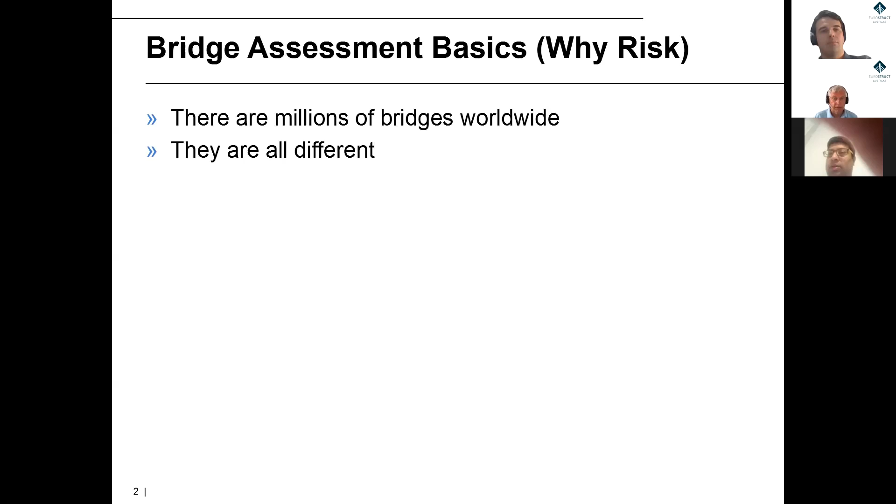We have millions of bridges worldwide, and they are all different. Of course there are some groups, and like in the US, sometimes you have very similar ones, but actually they are all more or less prototypes. So there is no one-size-fits-all strategy. This means you cannot just take a textbook and do bridge assessment just following a cooking recipe. This will not work, so we have to be flexible.

It's all about the availability and quality of information we have. This is also in relation to what Rade said in one of his talks before this one, that information is the basis for everything. We can do modeling, but if we have, let's say, halfway through information, our models will be wrong. In my practice, working on a couple of thousand bridges so far, I always found that the availability is never perfect. So if we have 50% of the necessary data in good quality, that's quite a lot.

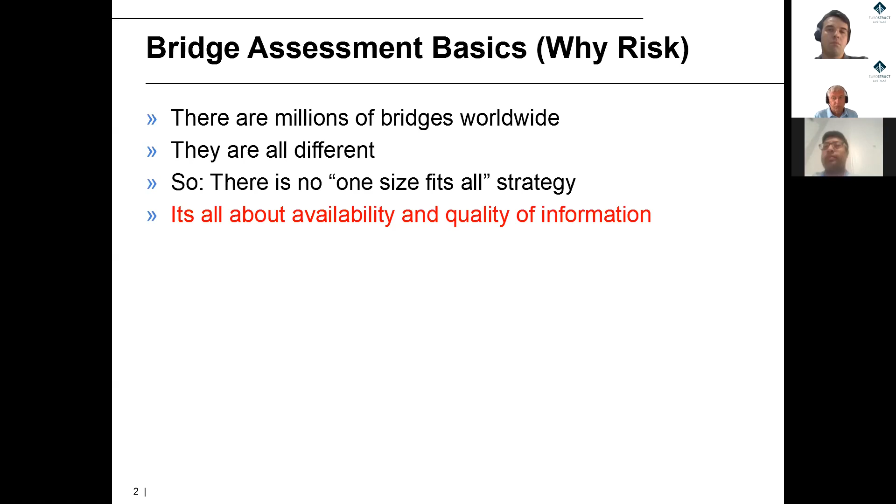So if you have clients working in this subject, tell them that this is the data, this is the asset they have. Now for monitoring: monitoring is mature. It is well developed and it shows performance. So a very, very good tool which we definitely need.

Our models depend on parameters. If we can measure these parameters, we can reduce the uncertainties. If we just estimate them, uncertainties will be much bigger. So this is one of the main purposes of applying monitoring systems: to measure parameters and reduce the uncertainties. This will make the assessment more reliable and to the point.

By to the point, I mean that very often we have certain aspects to look at. It is not only one risk, or one type of performance, or one type of excessive load to a structure—there are always several, and we have to go through them one by one. But if we have a very specific case, the monitoring system can measure your specific parameters and give you very good answers.

You can monitor everything, but it is economically not feasible to monitor everything. Monitoring systems have costs, and if you put thousands of sensors, first you have to pay for the system, and second you have to manage it, which are running costs no owner is normally willing to bear. So what we have to implement is flexible strategies which fit categories of structures—similar to the importance factors in Eurocode. If you have a signature bridge, which is a huge investment, more monitoring is justified. If your bridge is a 5-meter span side bridge, it might not be justified to use a lot of monitoring.

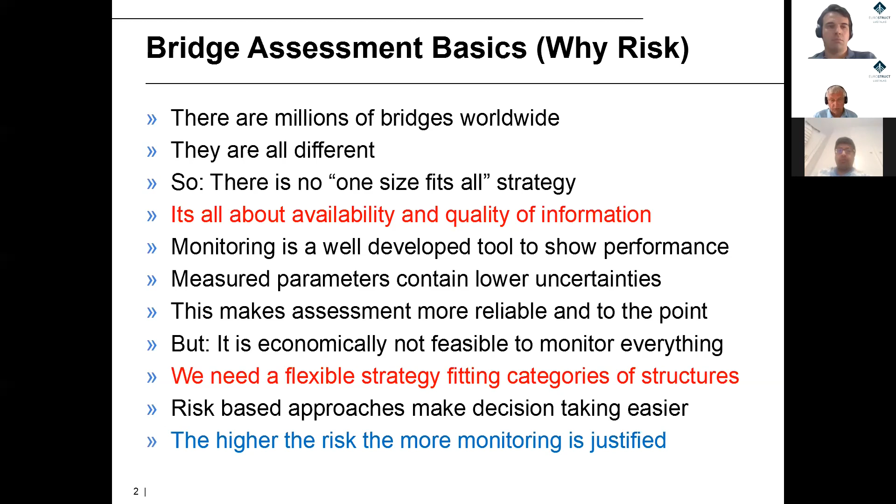So in the end, the higher the risk, the more monitoring is justified. I will talk about this a little bit later again.

So what does risk-based asset management mean? The objective of an asset manager is to get the best and most economic performance. The asset manager has only a certain budget, and has to apply it in the best and most economic way. I think that's a very simple objective. But risk is actually what jeopardizes this objective.

ISO 31000 defines risk as the effect of uncertainties on the objectives. And ISO 31000 is a risk management framework, which also proposes monitoring in order to reduce these uncertainties. So there is a background that has already been recognized worldwide and documented in the code.

So what we have to do is adjust asset management to the actual performance. This is easy to say but difficult to perform, and it has a very high impact on economic performance. I will show you later a graph where it is easy to understand.

Or we can go for condition. This is what many engineers prefer because the word condition is well known to them—performance is not yet so popular in the industry. But condition is anyway a key indicator for performance, so you always have to look into condition, because it will tell you when you have to do what in the end.

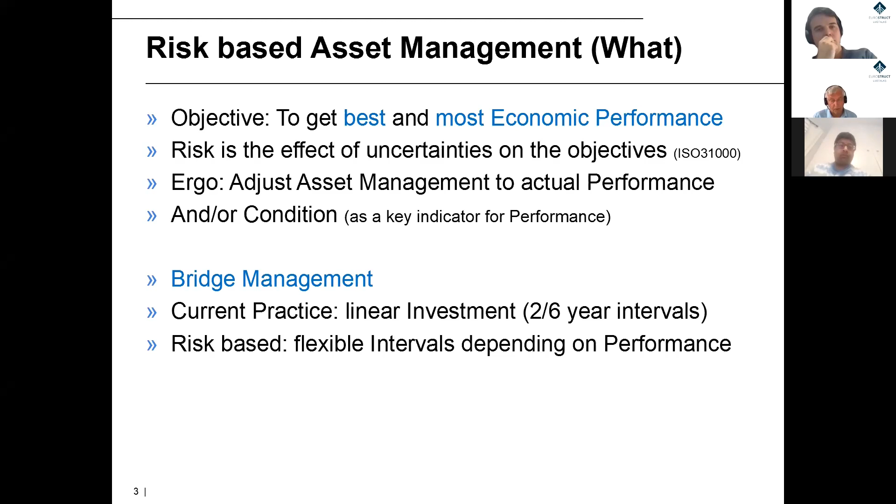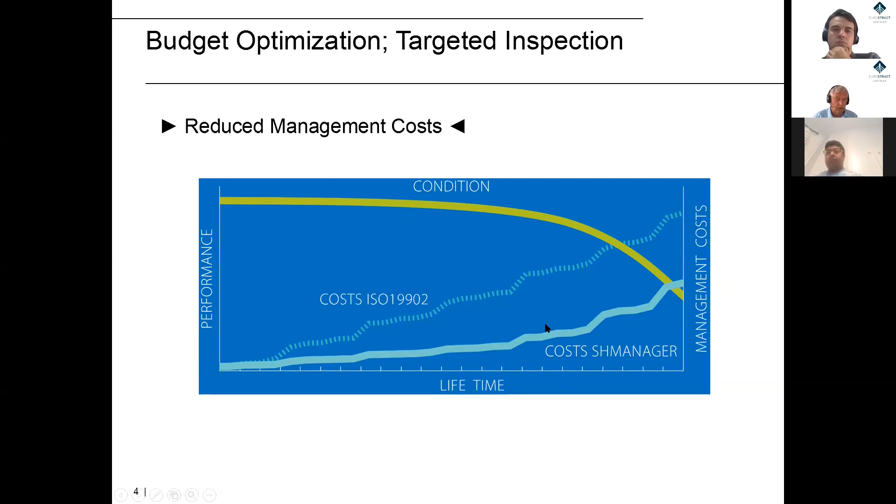Well, this does not mean that you save half of the costs, because the monitoring effort you have to put in here also has a cost. But it at least allows you, at the same cost, to achieve better performance.

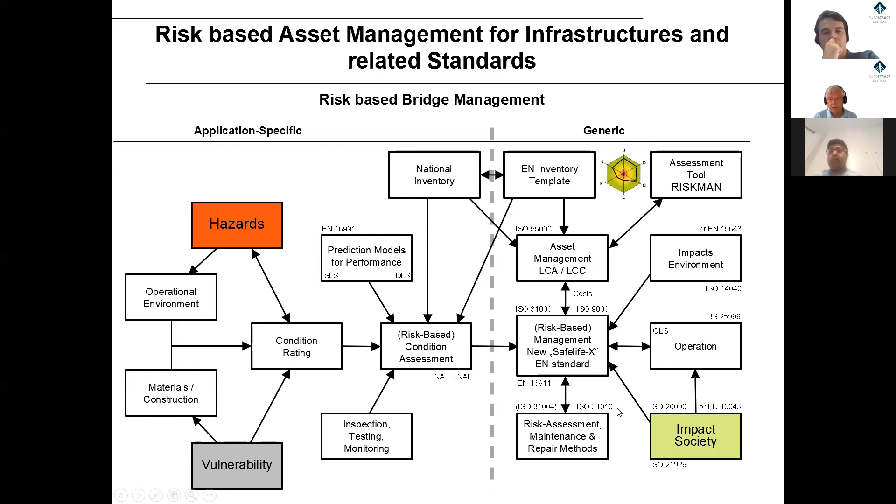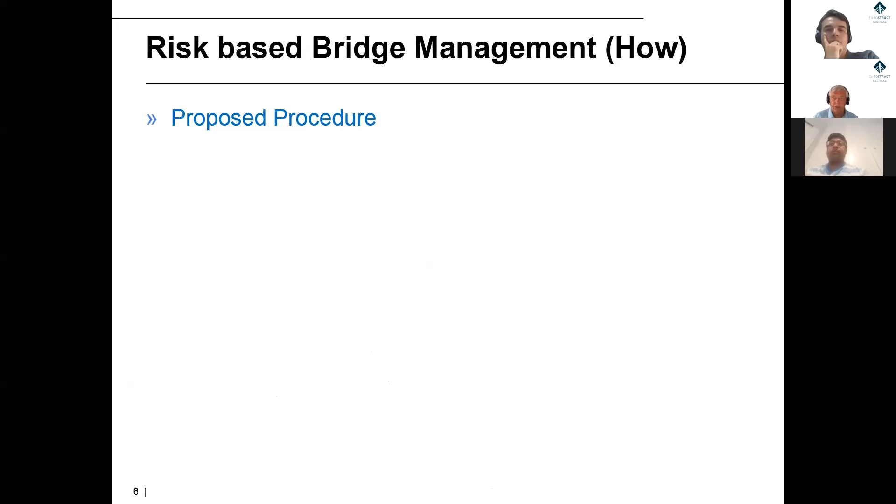Now, how to do that? What is risk-based bridge management? The proposed procedure, which I favor, is that we implement a suitable monitoring system. By suitable monitoring system, I mean it must not be one with 1,000 sensors, but something that just tells me that there is a change.

So just detection. In science, we would like to have detection, allocation, quantification, and all these things. But for bridge management, in the first place, this is not necessary. It is just necessary to get information that something is going wrong or going outside of your performance model.

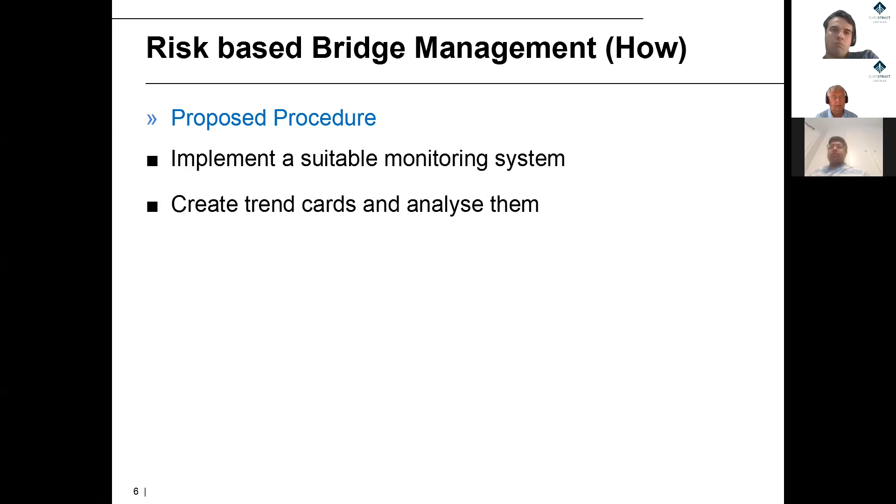The monitoring system will create trend cards. This means we look at the data time-wise and we analyze them. By doing that, we can reduce visual inspection by 50% through flexible intervals, as I have explained before. But you have to make sure that this does not bring you into a reliability situation you do not like.

And with this information created from the trend card, you can perform targeted mitigation. Mitigation is cheaper the earlier you find there is a problem. Monitoring systems are two orders of magnitude more sensitive than, let's say, an inspection every 2 or 6 years.

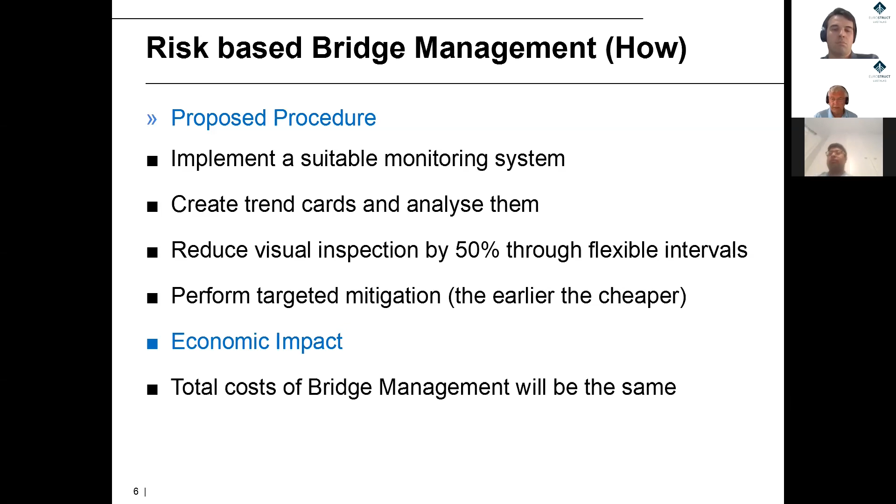So this means in the end, when you also include the mitigation costs, you will be much better off in this management. So what will be the economic impact? The total cost of bridge management will be the same. Monitoring costs money, and people that manage and maintain the monitoring cost money. But you can reduce the costs for inspection and other management activities. So you can keep it at the same level, but with much better performance.

So through this early detection, as I said before. Now, how do we do it in practice? For monitoring, we start with a small economic system that indicates changes in performance, or if you just call it condition - it's actually the same. It can be an index. An index does not have a very good reputation, but in the end, an index is understood by many people. One of the problems we have is that those working on the bridge hands-on do not have all this education in dynamic models or whatever it is, but they know what condition is.

In bridge management, we compute the risk. This does not mean we have only one risk - we have the risk of a storm, the risk of waves, the risk of traffic, of course. So we have to look into this separately. And then when we find some deviation from our normal predicted performance, we react on the changes.

Reacting on changes sometimes means: okay, I only know now that something is going not normal. Then I go out with a mobile system, or I make an intervention in the system in order to measure what is different.

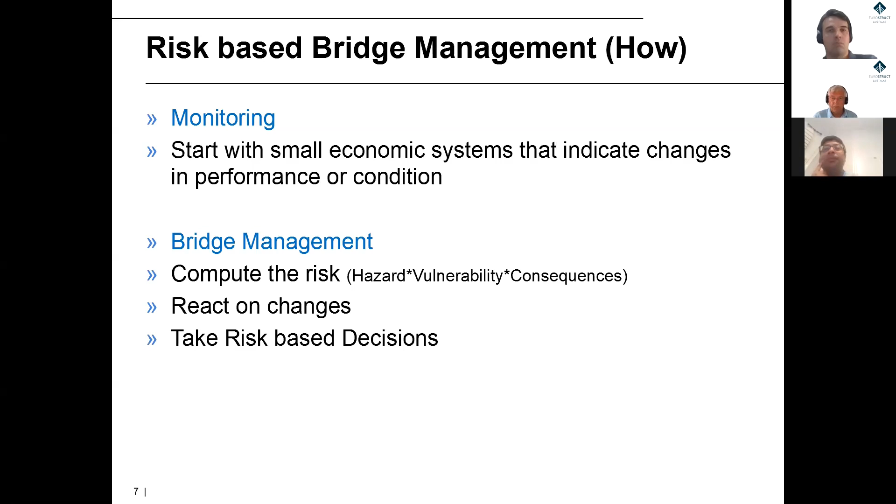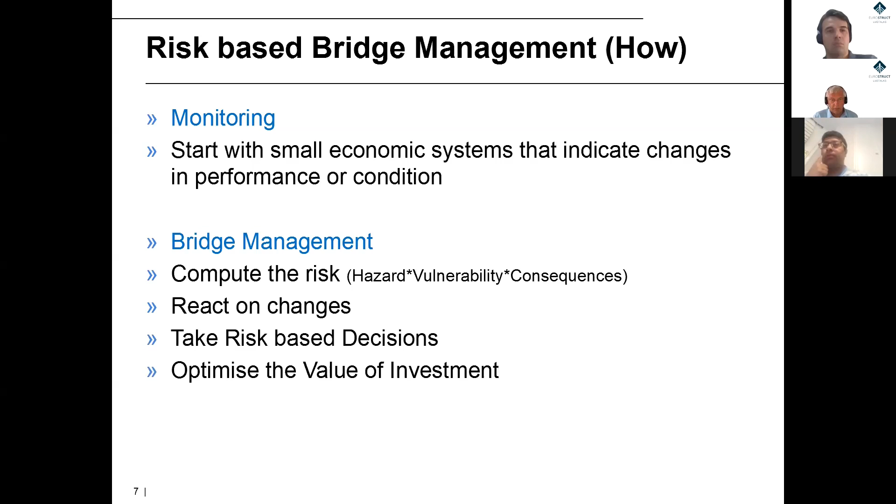Based on this information, I can take a risk-based decision, which are normally much better decisions. The problem is then the communication from the engineer to the decision maker, because decision makers in many cases are not engineers, but rather lawyers or economists. Therefore, this risk communication is something that decides between good and bad application. So it is advisable to look into this subject, and then you can optimize the value of investment.

One of the promising approaches was this one, a basic concept of change detection - this energy leakage. This is available from the IRIS project. This book is on the internet, you can download these things.

It's from large experiments - we have done full-scale tests in laboratories and on site to find out that when a structure is damaged, the energy which is in the fundamental frequencies is traveling to higher frequencies with the degree of damage. We call it cascades, and the number is just the mode where it goes to. This is a very reliable indicator, but it's not so easy when structures are very complex.

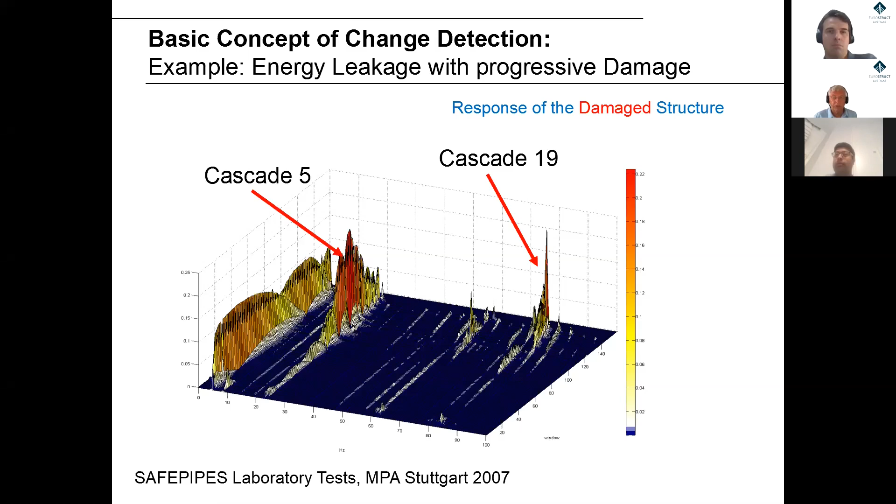This is an example from a real structure, a very big structure, where in the lower graph you see the structure is sound - it vibrates around 0.92 hertz. After a damage has happened, you see how different this is. It's the same structure, the same sensor, so you see the frequencies have dropped, and it is completely dispersing energy. This is something the computer can detect by itself - you don't have to do a manual evaluation, because the difference between these two is so big that it is easy to detect automatically. So in this case, this has already been applied successfully.

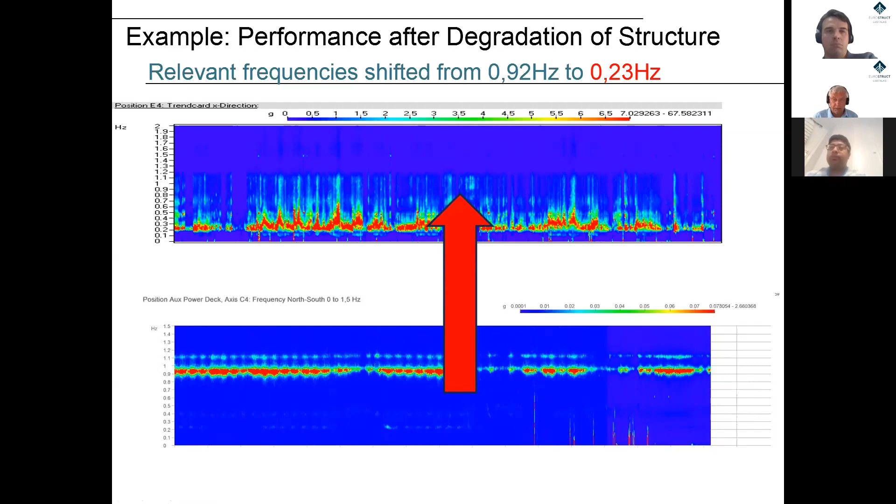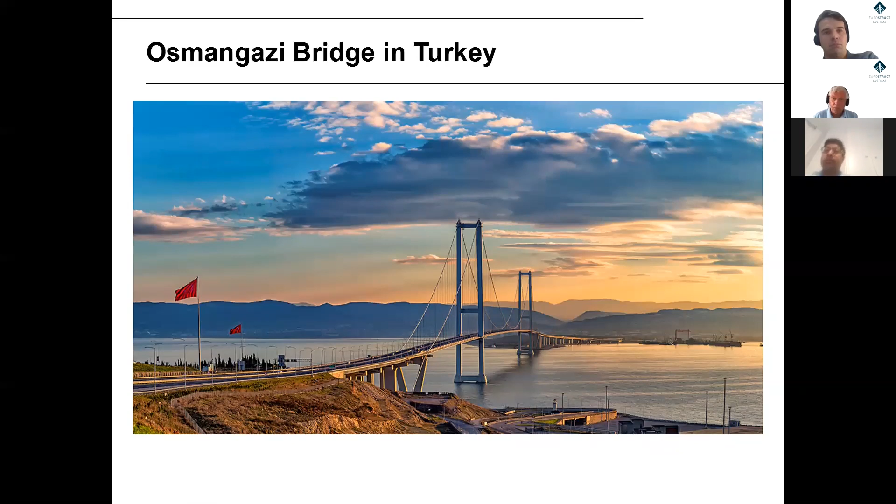Now I give you two examples from Turkey. There are a lot of very big bridges built in Turkey, with very interesting approaches and record spans. This is the Osman Gazi Bridge across the Izmit Bay, 1,550 meters main span. Such structures cost a billion dollars, so they deserve special attention.

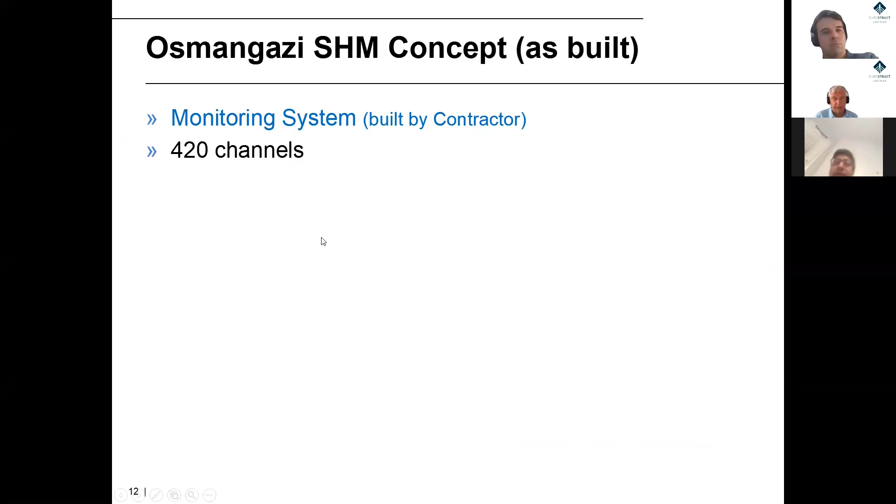The as-built structure's monitoring concept here was a monitoring system built by the contractor with 420 channels, dominantly fiber optic sensors. Fiber optic sensors give you very good information on strain, but only in a very limited place and in a very limited environment.

The asset management by the operator is different. The contractor gets a contract and goes away when everything is finished. The operator has to deal with this thing.

89 channels are permanently used for warning - this is for detection. This is only a little more than 20% of what we have here. And 331 channels are standby for rare events. You can play around with this channel, you can look at what happens, but in normal practical operation, there is no time and no personnel to do that. So the difference between what a contractor wants to do and what an operator needs sometimes creates some difficulties in using it.

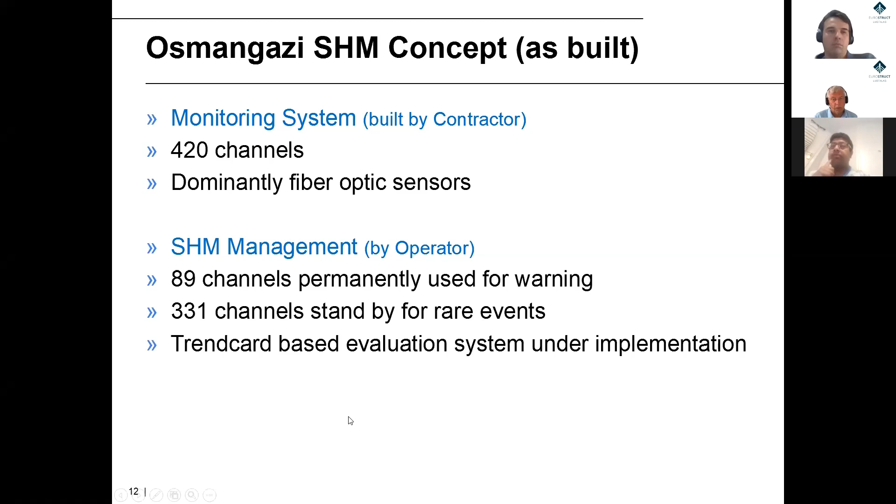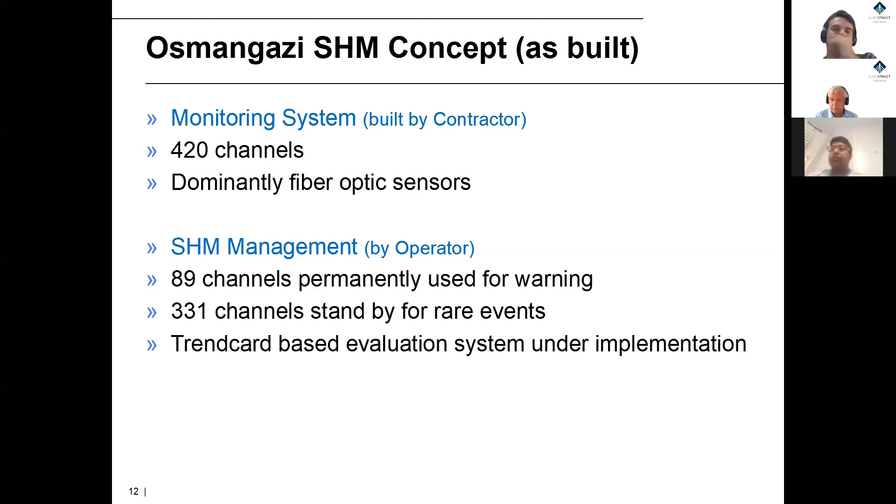This trend card-based evaluation system, as I've shown before, is currently being implemented by our Turkish colleagues. There are very good engineers there, and this will be one of the world-leading systems - it might make a good example. The second big bridge around Istanbul is the third Bosporus bridge in Turkey, also recently opened.

In this case, the bridge is now open for road traffic, but there will be a railway built in the middle. This is why you have these stay cables, and a suspension cable, which will finally support this railway structure.

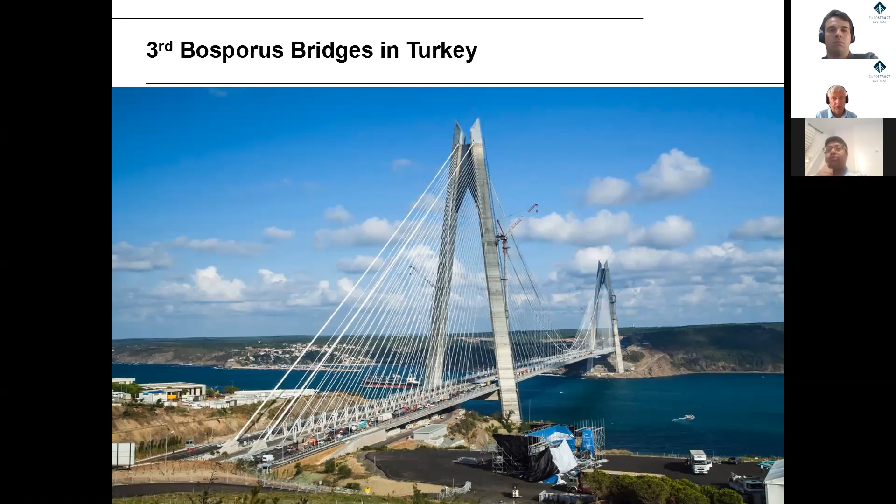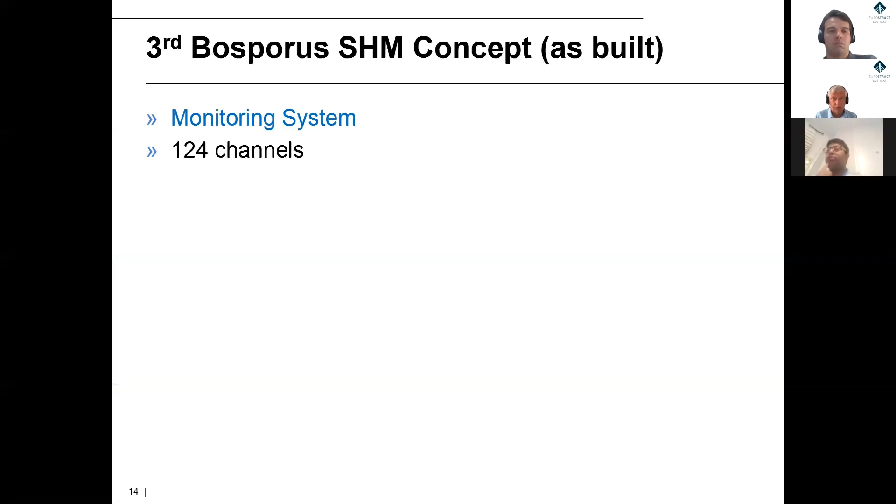In this case, we had the chance to discuss with everybody what the monitoring system should do. And the monitoring system only has 124 channels, and this is good enough. The bridge is 1,408 meters span - almost the same size - and it has dominantly dynamic sensors, acceleration and tilt.

With this, we get enough information to make this assessment. The SHM management needs 112 channels for warning and only 12 on standby. So in this case, at the time of construction, everybody was at one table. On the other project, there was nobody there from operation, unfortunately.

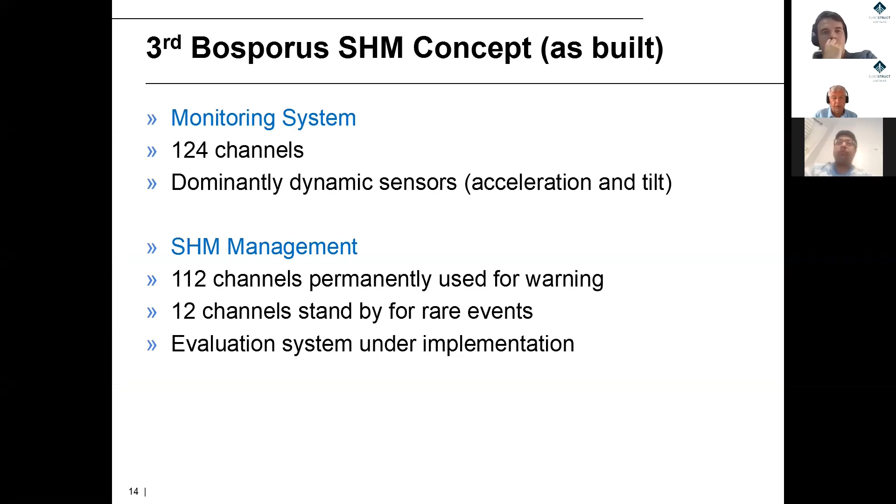Evaluation system is not yet ready.

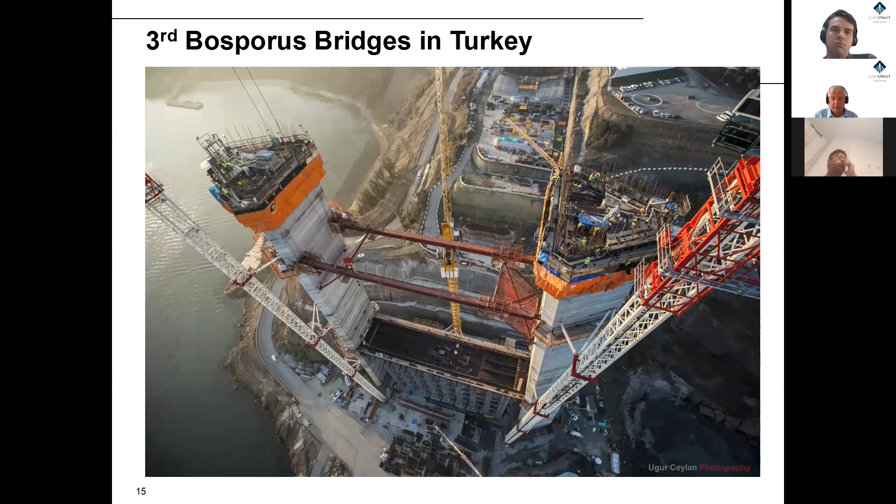Here was also a good example because we were able to monitor the pylons. These are the largest pylons in the world, 320 meters, and in freestanding position wind was a major issue. This dynamic monitoring was able to monitor during this erection, and the system was directly integrated into the final monitoring system. So from the beginning to the end, you can save money and use systems for several purposes.

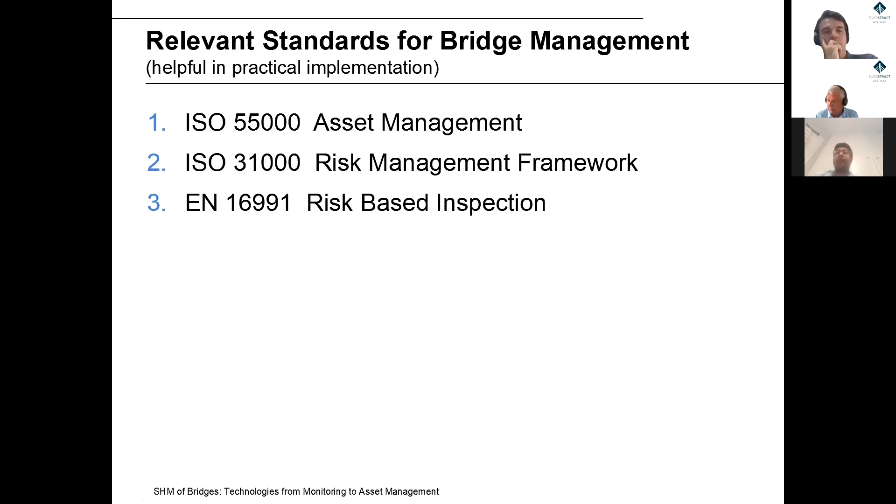Then there is this EN 16991. Vikram already mentioned it, on risk-based inspection. It's an industry code, but it contains the mathematical formulation of aging, which was developed based on bridges. So this code is very well usable, even though the title might lead you to the opinion that it is not good for bridges. It is good for bridges.

We are currently working on ISO 21928, which is sustainability of construction works. Unfortunately, due to some intervention from the United States, environment is not taken so seriously anymore, and we are in delay. We wanted to finish it last year, but we are still working on it. This code will give you all the indicators, the so-called soft indicators on economy, environment, and society.

This will round up our risk approach, because when your 5 meter span footbridge falls down, it's different than if one of the big bridges collapses. So this makes an impact on the decision.

In Germany, they're working on new guidelines and extension of DIN 1076. This is a very good example of a national code, but it requires a lot of input, which might not be enough funded in other countries. This one is our Austrian code, which I consider the most advanced one, but it is only in German, and only for Austria, based on the practice we have here, because we've been doing this for 25 years.

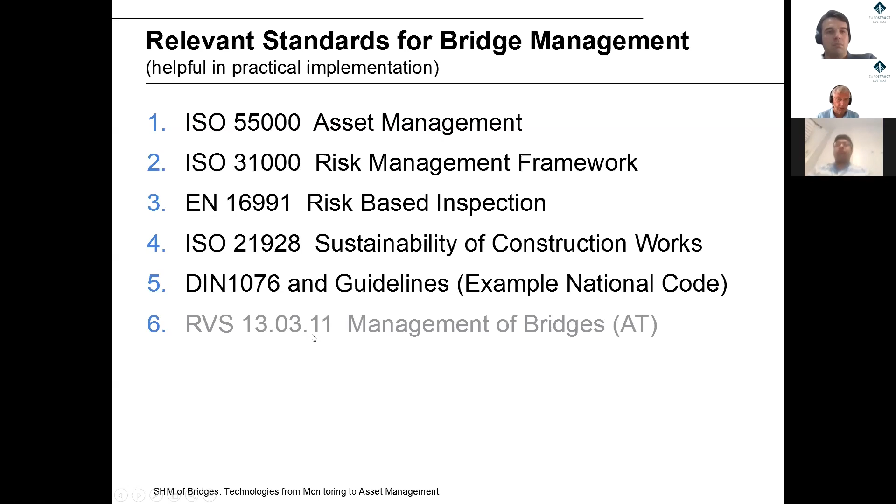You also have to consider the OSHA guidelines. This is for health and safety, and take your national safety and security guidelines into account, of course, and your individual management strategy. This means this is your expertise.

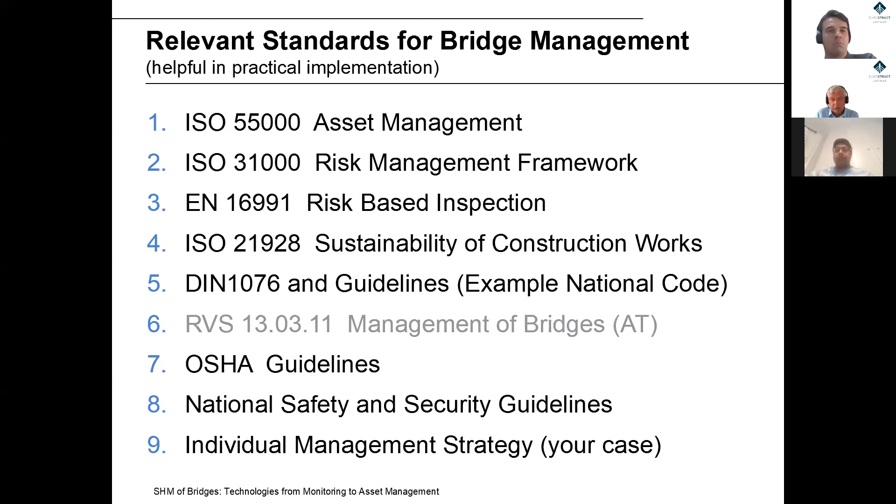Now, second last slide is on how do we show this. I was talking about communication, risk communication. This is a good way to communicate it.

Serviceability means operation limit state. This is your operation. This is an important thing, which is different from country to country and from the type of bridge, type of road, and so on. Economy is costs mainly. Environment are the sustainability factors.

The new ISO code will have about 130 factors, and there's a very nice list. There will be an Excel file where you can say, okay, this is important for me, this is not important for me. And then you can compute an index or whatever rating it is.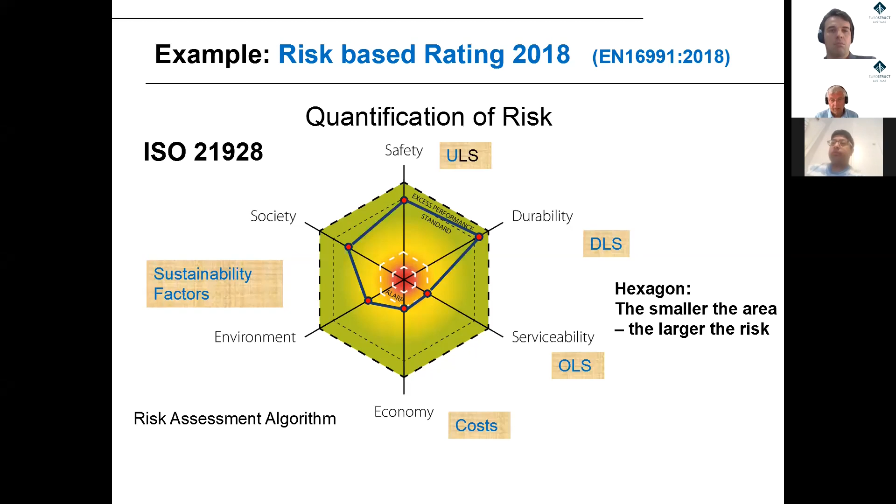As a summary, risk and performance-based approaches are preferable. They give you better results at the same costs, and if you apply them cleverly, you know we have a lot of bridges where we know there is nothing wrong, and they are very well designed, so this gives you a chance to even save money in operation.

A must is a good IT concept. You will either do it or not. If the IT concept is bad, you will have so many problems with IT that you say, forget it.

In future, we will definitely use BIM. We are not there yet in digital twins, but this will be helpful. I'm quite sure this will be helpful in this asset management work.

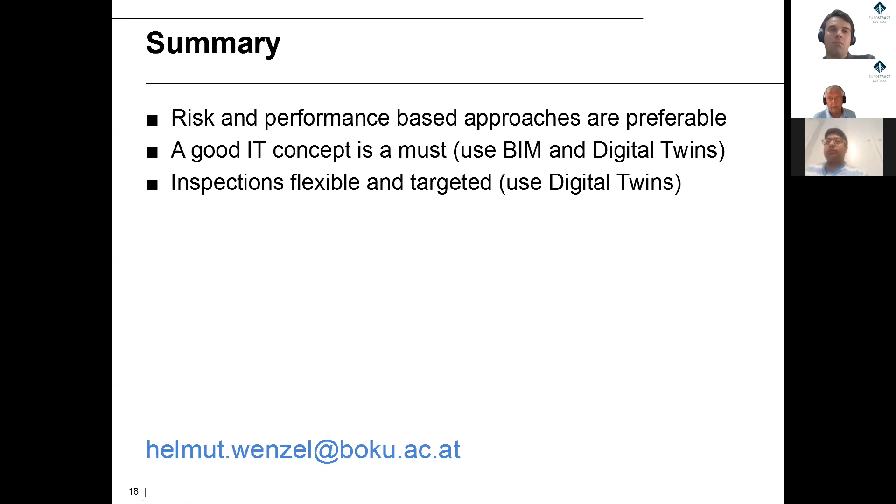We should do the inspections flexible and targeted. Here again, digital twins are a very good tool, and there is a lot of progress made in this direction, and I'm quite sure we will see some good examples here soon.

Now the categories of structures. The first one, permanent monitoring should be applied to signature structures. This is no question, nobody doubts it, but many owners think, okay, I put the monitoring system there and my duty is done. This is not the case. You have to make sure that the operation is also able to use this monitoring system.

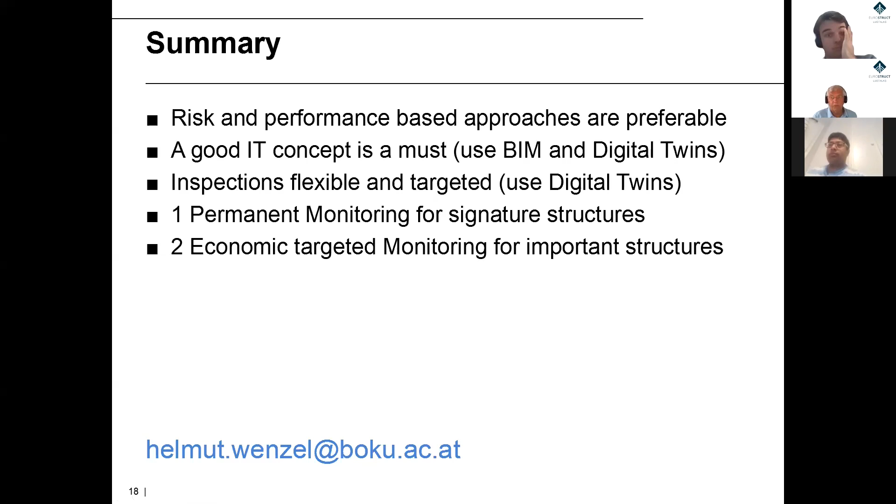The second group are the important structures. The first group might be 0.1% of our structures. The second group might be up to 5% of our structures, and we can use economic targeted monitoring on important structures. It is very often done, but not enough, and there are many reasons for that.

The big number is the fleet of structures, 95%. On-demand monitoring is what we should do there. Then in the end, establish a holistic risk management approach. If you can do that, you will do a good job. So that's it for the moment, and thank you for listening.

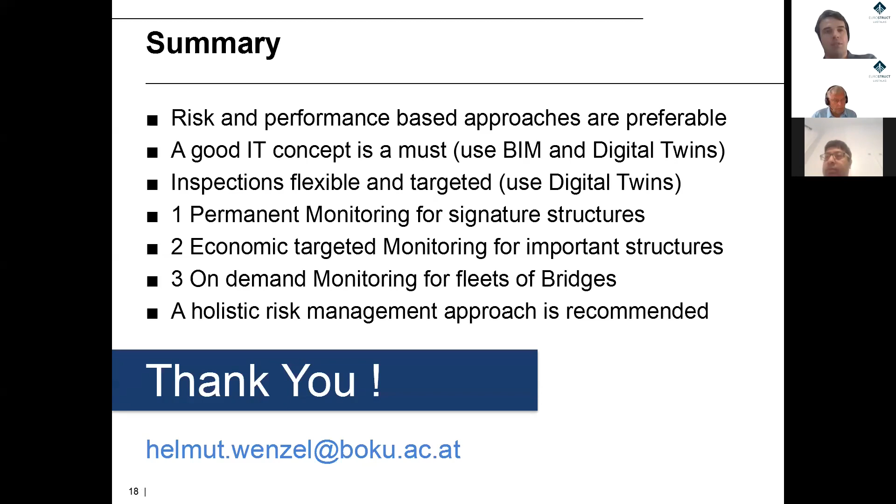Thank you, Helmut. Again, it is a pleasure to have you here with us today. It was a fantastic presentation, and also it was very good to work with you and with Vikram, of course, in WG5, where we deal with some of these discussions and points you raised today very closely with COST Action TU1406. So I think we are right on the point.